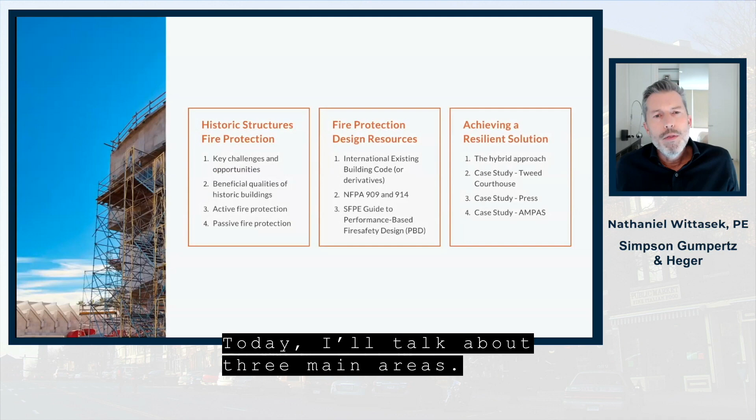Today, I'll talk about three main areas. The first is a general overview of historic structures fire protection. I'll look at the key challenges and opportunities, some of the beneficial qualities of historic buildings, as well as active and passive fire protection and the differences between them. We'll look at fire protection design resources.

If you're trying to achieve something without having to blow the budget or give up on a specific design intent, how can you do that using the codes as your basis, looking at the appropriate standards in the National Fire Protection Association or SFPE, looking at performance-based design? And then looking at resilient solutions - what is the notion of this hybrid approach where you're combining a codified approach with an approach to performance-based design?

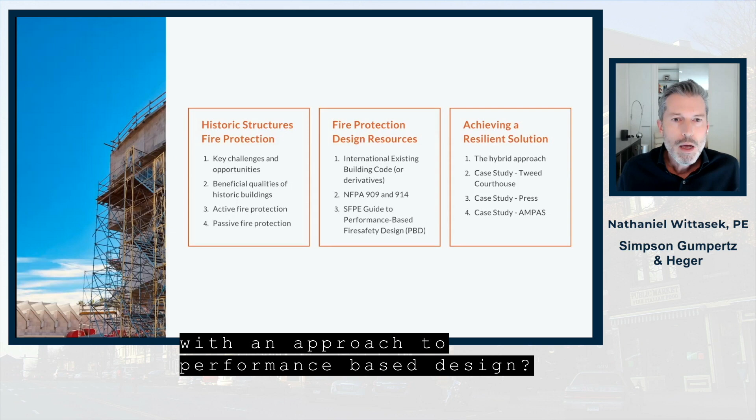I'll look at a few examples that we've dealt with over the years, including the Tweed Courthouse in New York, the Press Building in Los Angeles, and the AMPAS Museum in Los Angeles.

The landscape. Historic structures fire protection is probably one of the more challenging types of fire engineering you can do. For the same reason, it's probably one of the more interesting types of architecture you can find yourself involved with. It's very much about the things that you can't see that define how well or how difficult the process can be. We're looking here at the Mackintosh building, which is part of the Glasgow School of Art.

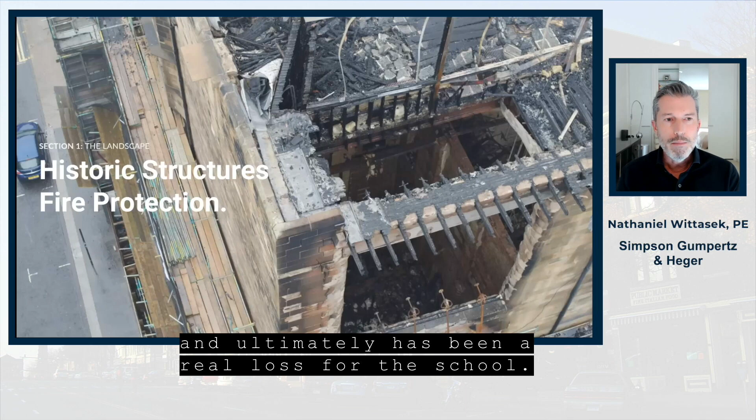It first caught fire in 2014, and while it was being restored, it caught fire again and ultimately has been a real loss for the school. But in part, there were questions and remain questions as to what could have been done differently, how they could have approached the building differently.

This is the question that we ask every single time that we approach a historic building. On the one hand, the building has been there for many, many years. And on the other hand, the building may need some improvements, especially if you're looking at a change of use, a significant alteration, or extensive repairs.

I've heard that fires are rare events, and indeed they are. But if we look at the numbers strictly in the United States, during the time that we will be having this discussion, we'll have approximately one fire in a structure approximately every 64 seconds. And with that, we will have a call for some kind of fire about twice as much as that.

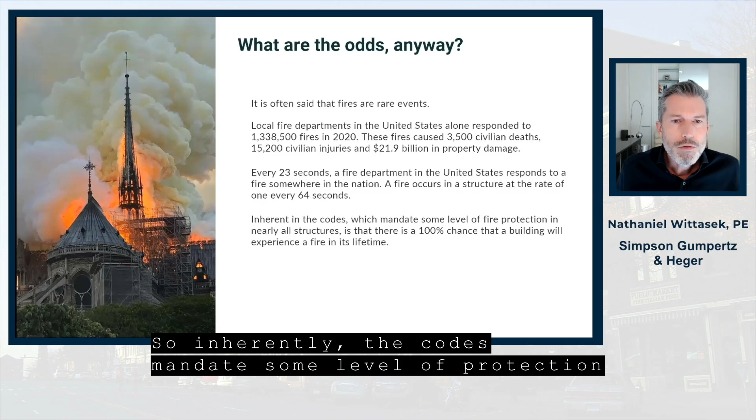So inherently, the codes mandate some level of protection in nearly all structures, with the assumption that the occupants of that structure will at some point face a fire, even though when you look at the larger statistical picture, it's not necessarily something that you would expect to happen at any given moment.

For this first part, I'm going to look at the challenges and opportunities posed by historic buildings. Historic buildings used technologies that were appropriate to the time they were built. Some of the historic buildings may have been constructed using codes, some maybe not. And what we very often find is, irrespective of what kind of code the building was constructed to, many things have often changed over time in those buildings.

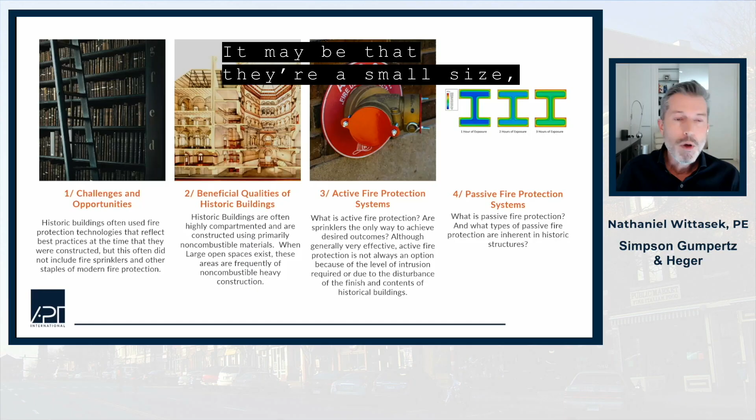What we do find is that the ones we're typically working on very often have some inherent beneficial qualities. It may be that they're a small size, which actually poses less of a threat to life safety. It may be the materials of construction, or maybe they have large volumes capable of absorbing a great deal of heat.

Either way, historic structures were built according to the state of the art at the time and are generally deemed safe and viewed as safe. It's when we start to make alterations to them or a change in occupancy that we really have to think about what we can do differently, and we have to navigate the complex network of codes that guide us.

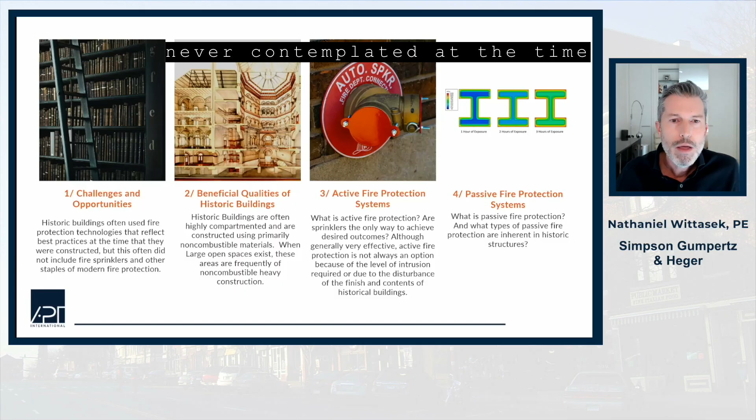As far as active fire protection systems, these pose special challenges for existing and historic structures. One of the main reasons is because these types of systems were often never contemplated at the time the historic structure was built. Because of this, we find ourselves trying to find space or provide an adequate area to actually place the fire protection sprinklers, which becomes a huge challenge for the designers.

Passive fire protection systems, on the other hand, were part and parcel of how many of these structures were constructed and designed in the first place. Whereas we had very few options for active systems, passive systems really took the place of the active systems in many of the historic buildings that we deal with.

I'm going to talk about something that we've all encountered: the notion that structural systems in historic buildings are sometimes vulnerable. On one hand, you may have a structure that's all concrete, blockwork, or stone, which inherently has fire-resistant properties. On the other hand, you may have structural systems that use cast iron, which has inherent challenges, especially when it comes to fire.

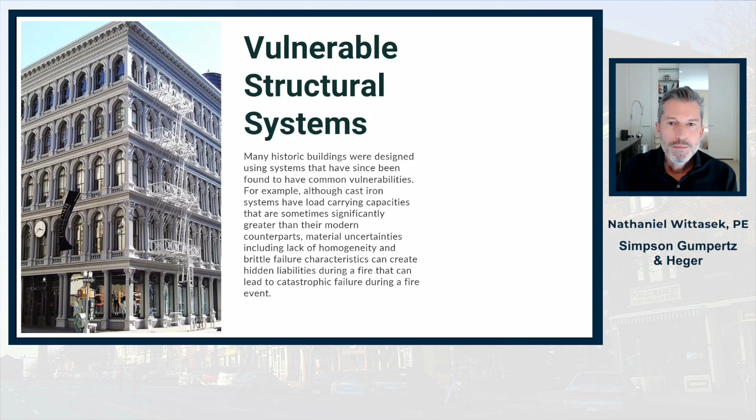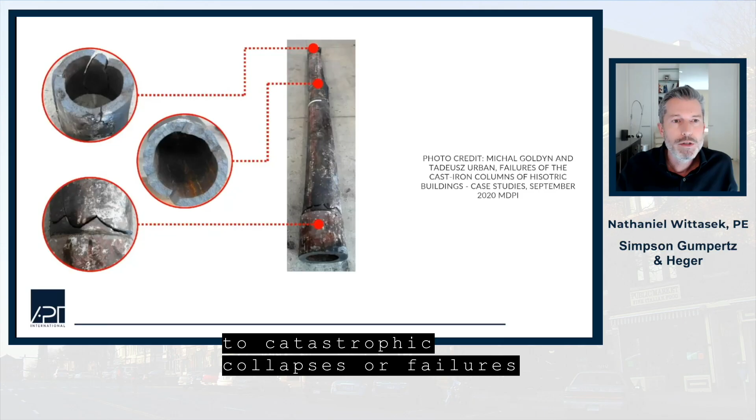In this diagram, you can see an example of some of the challenges we face. While cast iron may be a very strong material, it can sometimes be brittle. That brittle behavior can come about from a number of things, for example when freezing conditions cause water to get inside and expand, cracking the column. Or you could see that brittle behavior expressed through fire—intense heating followed by sudden cooling can cause brittle failure, and those failures can lead to catastrophic collapses of the structural members themselves.

Concealed combustible spaces: by modern standards, we often deal with some level of combustibility in what we'd otherwise think of as non-combustible buildings when dealing with a historic structure. Very often you'll see a building like Notre Dame that is primarily non-combustible but contains, in its hidden spaces, lots of timber. This isn't just Notre Dame—this is true of many older structures throughout our cities. In some cases the structures are entirely made of wood. So what we've learned is that even when there's nothing in the space, these types of combustible construction spaces can become a huge challenge.

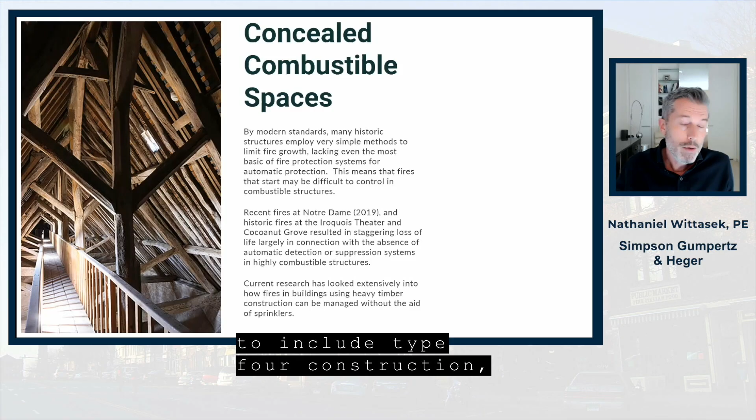One thing we can do is look toward modern research. Modern research shows us that wood, especially if it's dimensionally appropriate, can actually resist the effects of fire. This is why, for example, recent codes have changed to include Type 4 construction, and we're now actually building wood skyscrapers. So if we can build a wood skyscraper, why can't we make the wood in our existing historic structures work well—especially when those structures use members often much larger than what we'd use in conventional heavy timber construction?

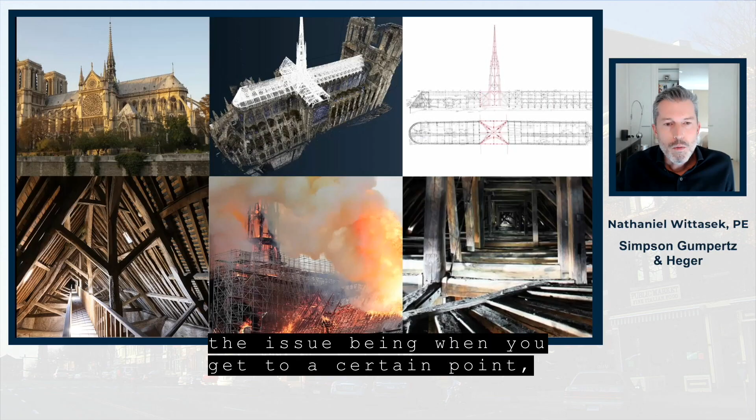Here we're looking at a few pictures of Notre Dame Cathedral. I bring this up because it's timely and relates to topics I'll go through today. We have the cathedral in its original condition, then a model scan showing the roof construction and spire—made of wood—highlighted, next to the actual plans for that. Below, we see what it looked like before the fire, during the fire, and after the fire. The issue is that even heavy timber construction can fail at a certain point. But perhaps we can do things to address that inherently with wood construction.

Let's take a look at a video where we learn about some fire tests recently performed to validate the use of wood in modern construction. This is instructional for how we can address some of the same problems we might deal with in historic building construction. We designed a series of 5 tests to investigate the fire performance of CLT.

To make the test as realistic as possible, we built a 2-story, full-scale structure at the Bureau of Alcohol, Tobacco, and Firearms Fire Research Laboratory. The floor plan was a typical 1-bedroom apartment that we jam-packed with furniture to fuel the fire. Tests 1 through 3 were conducted without a sprinkler system. Test 2 included 30% exposed CLT ceiling in the living room and bedroom, while the other CLT surfaces were covered with gypsum board. To begin the test, the fire was ignited in a lower kitchen cabinet.

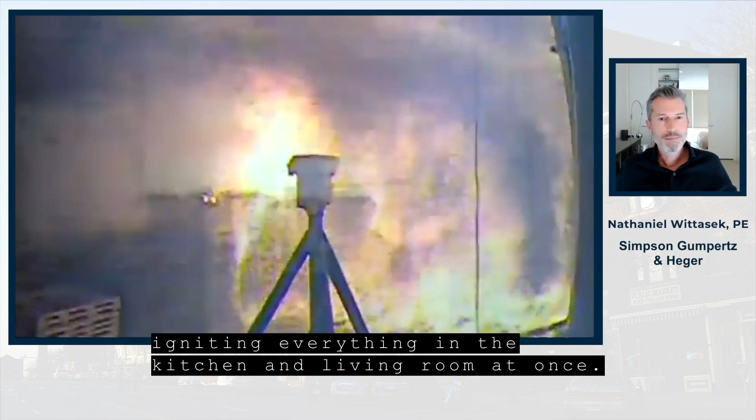As the fire grew, a layer of hot gas began to form on the ceiling, continuing to expand until flashover occurred at about 12 minutes into the test, igniting everything in the kitchen and living room at once. From there, the layer of hot gas spread into the bedroom and the process repeated: the gas layer expanded until flashover was reached and the entire room was engulfed in flames. Flashover in the bedroom occurred roughly 6 minutes after flashover in the kitchen and living room.

Around 25 minutes into the test, the fire began to decay. After the fire started to die down, the apartment door failed at 30 minutes. However, the fire did not spread into the hallway, maintaining a safe environment for firefighters and people leaving the building. As the contents of the apartment burned out, the fire self-extinguished.

For the 4th and 5th tests, we explored the effect of an automatic fire sprinkler system on fire performance. The CLT was left completely exposed for the 5th test, and we delayed the activation of the sprinkler system for 20 minutes. Temperatures soared to around 700 degrees Celsius, but once the sprinklers were activated, they cooled to approximately 50 degrees Celsius in a matter of minutes. The sprinklers effectively suppressed the fully engulfed apartment.

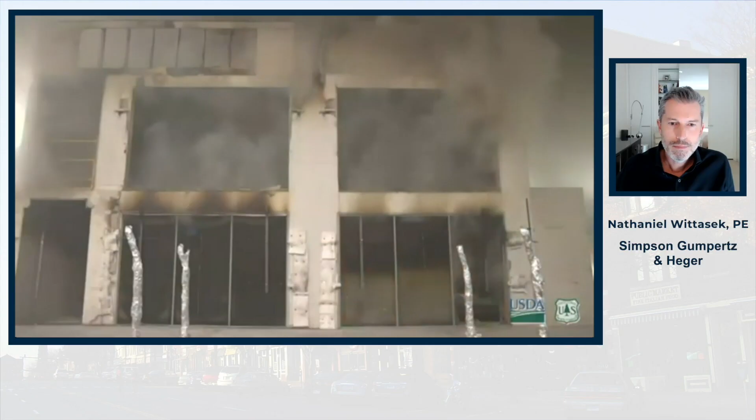These tests demonstrated that it is possible to build a cross-laminated timber building that's fire-resistant, even with exposed CLT. Researchers now have a better understanding of the performance of timber buildings under fire conditions. The data collected will help inform building codes, address the safety of occupants, and lead to safer firefighting in CLT buildings, allowing designers to bring wood buildings to new heights.

While a lot of this is applicable to, for example, CLT, a great part of the research was focused on the inherent fire resistance of heavy timber, and especially the charring characteristics. This is true for both heavy timber structures that are provided with sprinkler protection and heavy timber structures that are not provided with sprinkler protection.

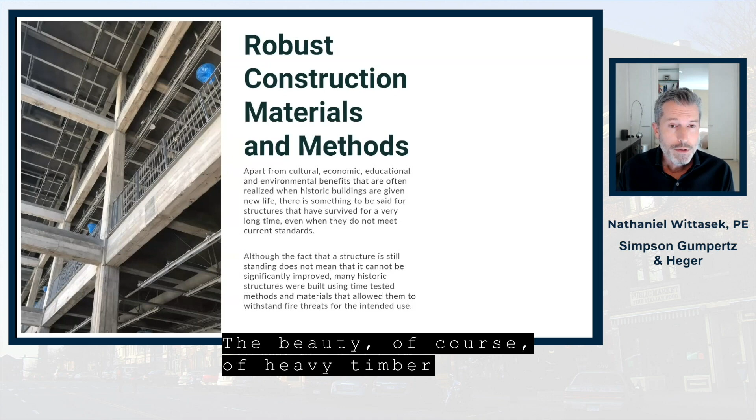The beauty, of course, of heavy timber is that it is a passive fire protection system in of itself. It is when you are trying to achieve specific ratings that you may have to complement existing heavy timber with certain types of non-combustible coverings. In the case of the testing that led to the changes in the International Building Code, for example, the material used to achieve those higher ratings was gypsum.

Now, in these cases, I wanted you to note that part of the test regime that was run included non-sprinklered cases. This is important because many of the historic structures that we deal with are not sprinklered. And as we all know, sometimes this can be a major challenge, to introduce sprinklers.

But perhaps by treating some of the exposed wood in concealed areas, we can actually achieve some of the aims that we're trying to achieve with sprinklers. And I think that's one of the key lessons to take with you: sprinklers are one way to achieve the intended aims of a fire life safety design, but they're certainly not the only way to do it.

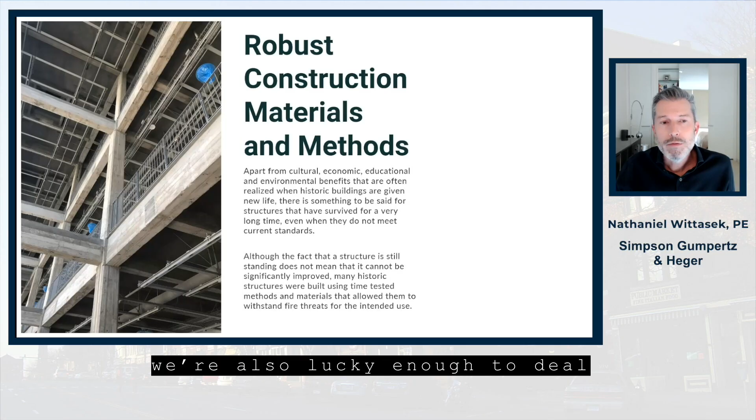In many of the historic buildings that we deal with, we're also lucky enough to deal with very robust materials. Here, for example, you can see board-formed concrete columns and beams. These are part of an existing historic structure that was being renovated.

And while you have to clean up some of the spalling and areas where the structure may have come apart over the years, that is quite doable, and you actually are left with a very robust structure at the end of the day. This is true of many, many historic buildings that we wish to save, and in some cases will result in a life safety system that will exceed what we would even anticipate using the current codes.

When I speak of active fire protection systems, of course, I'm referring primarily to fire sprinkler systems. Active fire protection systems are those systems that involve initiating elements that trigger complex responses by one or more building systems comprised of multiple elements that act together to limit the effect of smoke and fire. This sounds complicated in part because it is a bit more complicated.

Active systems require that we rely on lots of pieces working together. Common examples of these types of systems, of course, are fire sprinklers, smoke control or venting systems, automatic closing fire shutters, which may be part of a passive system, and emergency communications alarms that are typically used in many of our modern buildings.

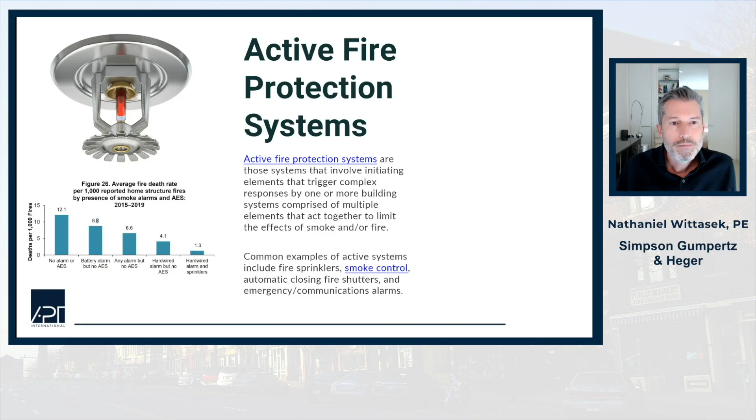Passive systems, on the other hand, are really the oldest form of fire protection. They're systems that do not require a sequenced response to aid in the control of smoke or fire spread. They're always in place and constantly working to reduce fire spread before a fire event starts, and to assist in the safe occupant evacuation during a fire event.

Passive systems are quite interesting because sometimes a passive system will contain an active element. For example, if you have an automatic closing door, you might say that's part of an active system, but this is where the line blurs a little. The point is that it will fail-safe close typically, and then allow the barrier systems in the building to control and contain the effects of fire.

Containing the effects of fire serves a couple of purposes. First, it prevents the fire from spreading to many areas of the building simultaneously. Second, it allows time for occupants to move away from the hazard, out of the building into a point of safety, and time for firefighters to reach the building and control the fire through manual suppression efforts.

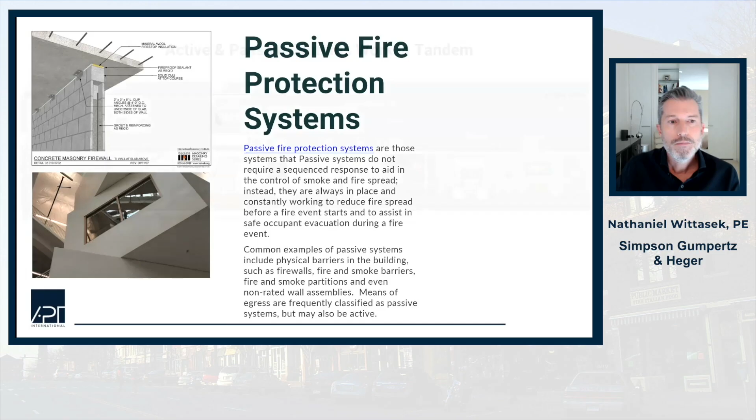Active and passive systems work together, of course. That's the reality. And what we find in historic buildings is that the trade-offs between active and passive systems are essential. You have to have the ability to trade one type of system for another if you're intending to preserve something that was not designed originally according to a specific code.

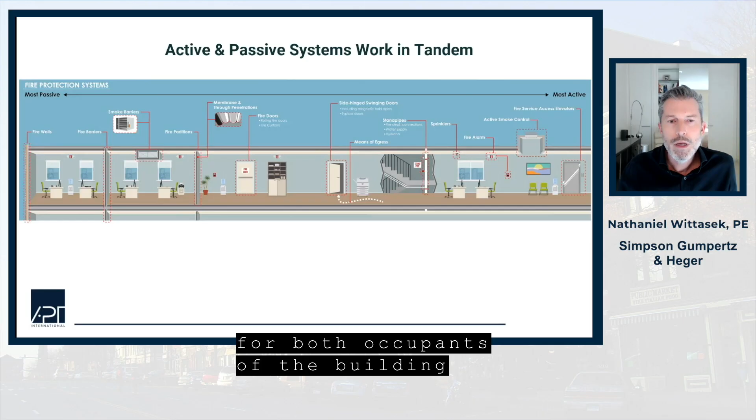You may have sprinklers used to substitute for a lack of passive barriers. Or alternatively, if you can't provide sprinklers, you could use passive barrier systems to achieve a similar level of safety. We are definitely biased towards providing sprinklers in these types of structures, but sprinklers are not the only solution. Again, it's about containing fires and buying time for both occupants of the building and the firefighters there to respond to building fires.

Part 2, let's look at the rules of the road: historic buildings, fire protection, design resources.

Now, how can you use design tools to come up with smart solutions? Well, in the United States, we follow prescriptive codes largely. But even in our prescriptive codes, there are performance-based aspects of those codes. These prescriptive codes have served us well, for well over 100 years, for more than 99% of the buildings out there.

There are, however, some projects for which the sole use of prescriptive approaches may not yield a result that is either cost-effective, sensitive to your particular aesthetic or the historic features of a building, or responsive to other unique characteristics of the structure. So it is when we use the codes and standards together with performance-based design that we can achieve better results for the remaining 1% of those buildings.

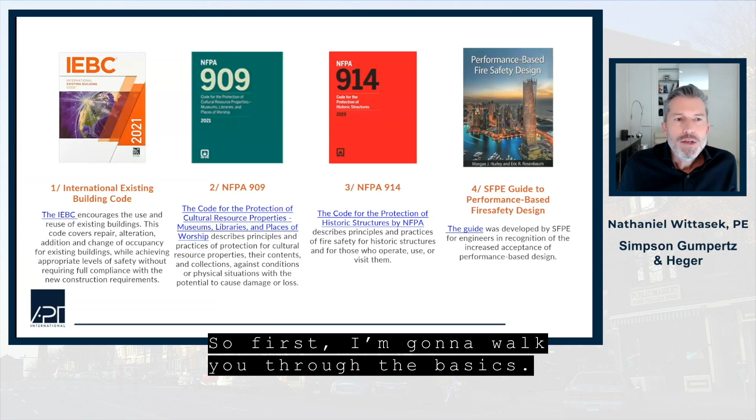So first, I'm going to walk you through the basics. The International Existing Building Code is one of the codes that many jurisdictions across the country adopt. It's designed to encourage the use and reuse of existing buildings. The whole purpose is to allow us to make effective and safe restorations to allow for the continued use of buildings. Within this subset is a subset of historic buildings.

Some states, like California, have their own state historical building code, and it works in concert with the existing building code.

Second, standards such as NFPA 909 or 914, the Code for Protection of Cultural Resource Properties, museums, libraries, and places of worship, or the Code for the Protection of Historic Structures, are both examples of standards that are sometimes applied very much like a code, or applied in the context of the code process.

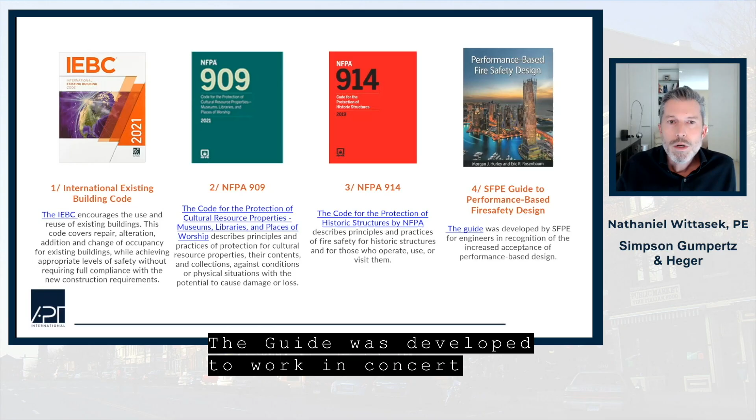Finally, we have the guide. The guide is produced by the Society of Fire Protection Engineers. It was developed to work in concert with the standards and the codes to allow for performance-based design. I'll touch on this in just a moment.

In the International Existing Building Code, there are key areas of concern, which is to establish what the minimum requirements for safety are. One of the principles in fire and life safety is that if you're going to touch a building, if you're going to work on it, you should at least meet basic standards for fire protection and life safety. And so this code has been set up to address those.

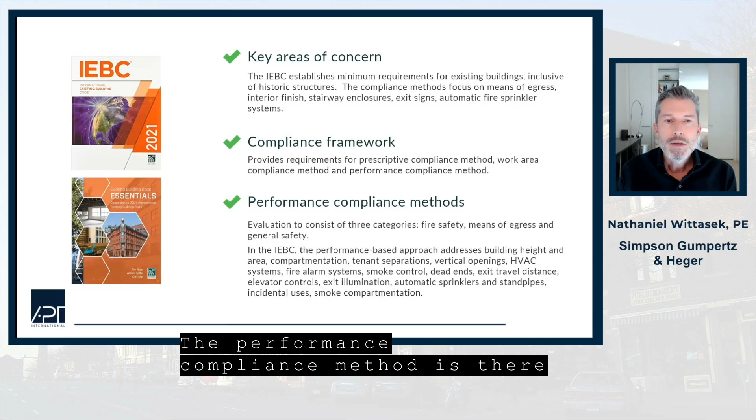It provides these through a compliance framework, which lays out prescriptive compliance methods, what's called the work area compliance method, and the performance compliance method. The performance compliance method is there to help us address 3 main categories: fire safety, means of egress, and general safety.

It's here that we're able to look at the specifics of a historic structure and evaluate them on a comparative or relative basis. This helps us understand if what we're doing is making the structure safer, ultimately, or potentially less safe through unintentional modifications.

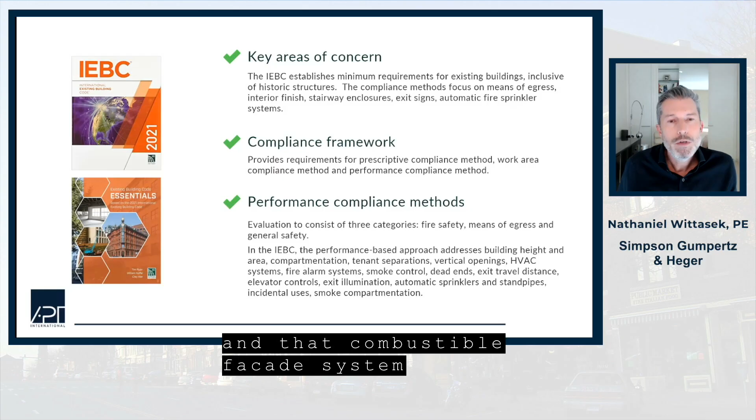We've all heard of cases where structures have been unintentionally made less safe. One that immediately comes to mind is the Grenfell fire. They added a combustible facade system, and that ultimately made the building less safe, even though it was designed and intended to improve the quality of life for the people in the building.

NFPA 909 contains many resources. These two, 909 and 914, are probably the most referenced when it comes to historic buildings. Even though 909 is addressed to the protection of cultural resource properties, museums, libraries, and places of worship, many of its principles are often applied to other historic buildings.

The idea is to be able to understand what the improvements are or are not doing, whether they are affecting the life safety in the building, and how you can quantify that in a way that everyone can understand what's happening and if they're comfortable with that.

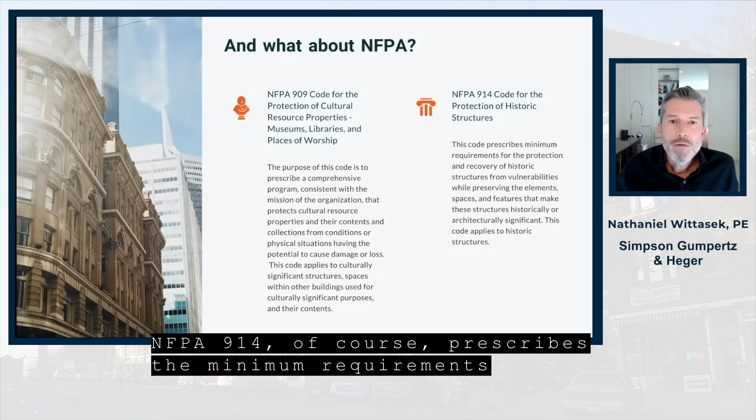NFPA 914 prescribes the minimum requirements for the protection and recovery of historic structures from vulnerabilities while preserving the elements, spaces, and features that make them historically or architecturally significant. This is a recognition that there are features in these buildings that may not comply with current codes, but which are extremely important in terms of the overall purpose and history of the building and its continued use.

The SFPE performance-based process is used in conjunction with both of these standards and with the International Existing Building Code. This process was developed by the Society of Fire Protection Engineers specifically to address complex challenges for fire protection. And these challenges don't always have the same solution.

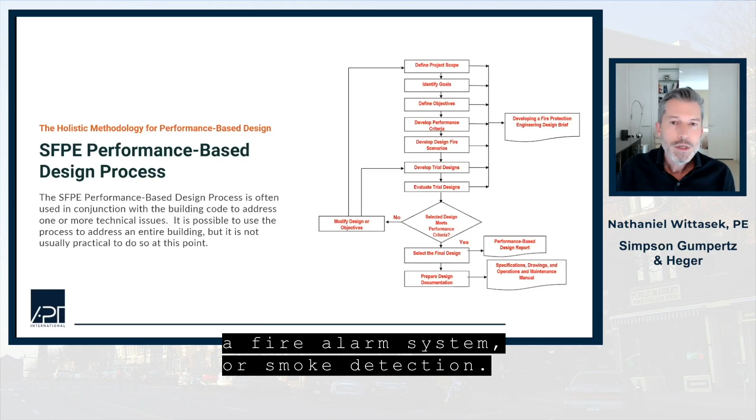The codes tell you to provide sprinklers, or they tell you to provide a fire alarm system or smoke detection. This approach only asks you: what are your goals? What are your objectives? And what are the criteria that we must meet to be considered successful?

By establishing those for any given problem, it doesn't have to be for an entire building, but could be for a specific problem you're trying to address in an existing historic structure, you can solve that problem. So this is effectively a communications tool and a methodology for analyzing hazards.

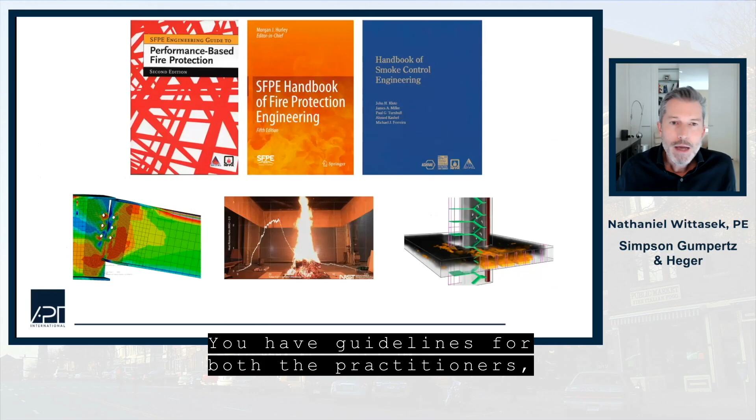The method comes with more than the flowchart, of course. You have guidelines for both the practitioners and for the authorities having jurisdiction. You have compendiums of resources for fire protection calculations, smoke control, and numerous other tools.

In performance-based design for historic structures, we start with the design fire, which is what we see here in the middle at the bottom. That design fire is what we use to evaluate safety for different scenarios in the building. In any given building, you may have multiple scenarios and multiple design fires.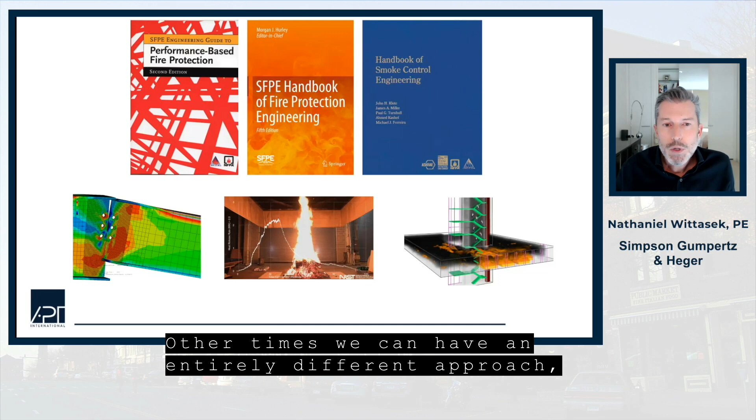Once we know what we're facing, we can address that through thoughtful analysis with thoughtful solutions that fit with either what's there with minor modifications, and sometimes with substantial modifications. Other times we can have an entirely different approach, or multiple approaches, that yield the same result. This is the beauty of the performance-based method, and why, in part, it works so well with historic structures.

In this last part, I'll walk you through achieving resilient solutions. I'll walk you through some examples of projects with which I have personally participated, or my colleagues have participated, over the years.

Buildings, when they're maintained as they were intended to be, with minimal disruptions, absolutely serve our society. They do hold a special place for all of us in preserving tradition, and it's one of the reasons why we have to take special care to actually preserve these buildings.

Resiliency is a term that's often used to describe how a building responds to threats of any kind. For example, the USGBC defines resilience as the ability to prepare and plan for, absorb, recover from, and more successfully adapt to adverse events.

Sometimes resilience is just about outlasting the other guy. In the case of a historic building, these buildings have shown us remarkable resilience over time. Sometimes they fall out of use, and the very interventions that architects and engineers perform can make a huge difference, allowing these buildings to continue showing their resilience. What we have to watch out for is when we perform specific alterations or changes to these structures—that's when we may get into trouble. But it's also an opportunity to truly preserve for a much longer time, and for more people, what was there, allowing continued use of these beautiful structures.

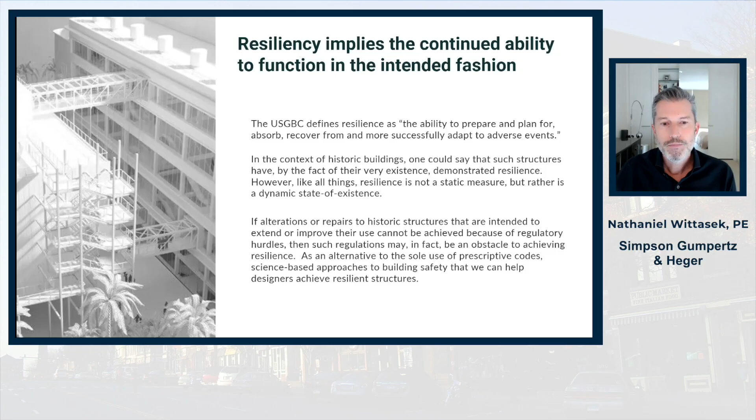I'm going to touch upon the notion of the hybrid approach, which I referenced at the beginning of this presentation. The real world is not purely code, and it's not purely performance-based, at least not in most buildings we work on in the United States. Many of our projects involve elements of both performance and prescriptive design. It's not practical to look at the entire building using performance-based design at this time, but it's also not practical to rely solely upon prescriptive requirements. Prescriptive requirements were developed with the notion that they would work for most buildings most of the time, and they've done remarkably well at that.

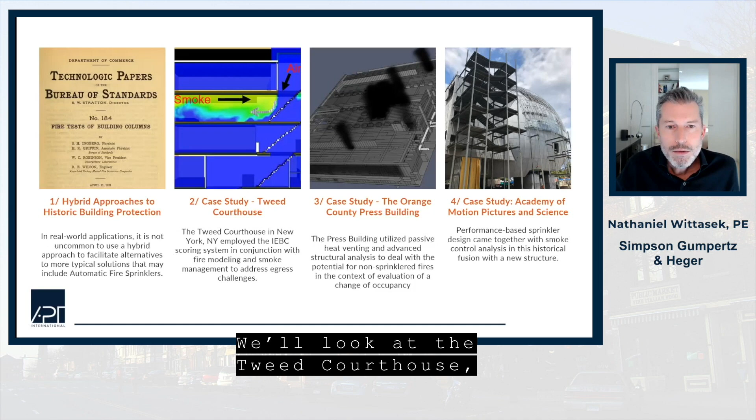I'll briefly walk you through some examples of how our approaches have helped us address complex challenges, sometimes with and sometimes without fire protection sprinkler systems. We'll look at the Tweed Courthouse, the Orange County Press Building which served the Los Angeles Times, and the Academy of Motion Pictures and Science. This structure is a fusion of new and old.

Before I go there, I'll talk about what's on everyone's mind: how do we deal with the constant challenge of being asked to provide fire protection or sprinkler systems in these beautiful old structures? Very often, you'd be surprised, but it can be done in many cases, and there are reasons why it has become much more the norm over the past few years. For example, in the structure you're seeing right now, which I worked on for several years, there are sprinklers in some areas, but in other areas that were sensitive because of aesthetic or other reasons, we did not have sprinklers, or we had modifications to what would have otherwise been required by NFPA 13, the standard for installation of sprinkler systems.

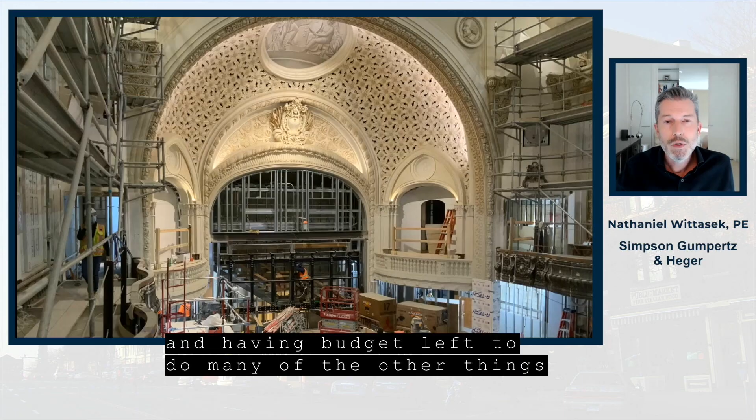The bigger issue, of course, for many owners is cost. You have to sometimes look to more creative approaches to understand how we can achieve the level of protection we desire without destroying the budget, leaving budget left to do many of the other things we wish to achieve in these historic structures.

The general approach is that we first start by identifying the historic building code requirements, using the codes I described earlier. Then we focus on the most important challenges—what are the issues that we know are of the greatest concern to the authorities having jurisdiction, i.e. the fire marshal or the building official?

Next, we set up a way to work together—not just as the design team, but as the design team with the authorities having jurisdiction. In my experience, the AHJ is one of the most critical members of this team, because the AHJ lives with this building in terms of their response to it and their responsibility for protecting it down the road.

Once we understand what the stakeholders want, what the building needs, and what the baseline requirements are, that's when we can start to consider the holistic approach. This is an approach that may start with a prescriptive basis but identify a key challenge—some may call it a deficiency, others may call it an alternate means and methods. But it is this approach that lets us often arrive at solutions that can meet our needs, whatever those needs may be.

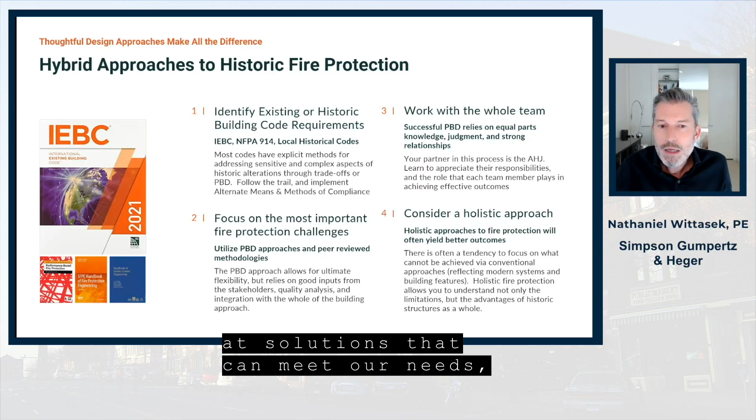As I alluded to, engagement is the key. The way that we tackle performance-based design with prescriptive design makes all the difference. The approach should adhere to our basic codes, the standards, the SFPE guidelines when we're dealing with performance-based design. We should look at our analysis methods and tie them together with peer reviewed references. The key is you can't go out there and make up your own methodology and expect it to be received well—you should be using methodologies that have been peer reviewed or that at least have a basis in literature.

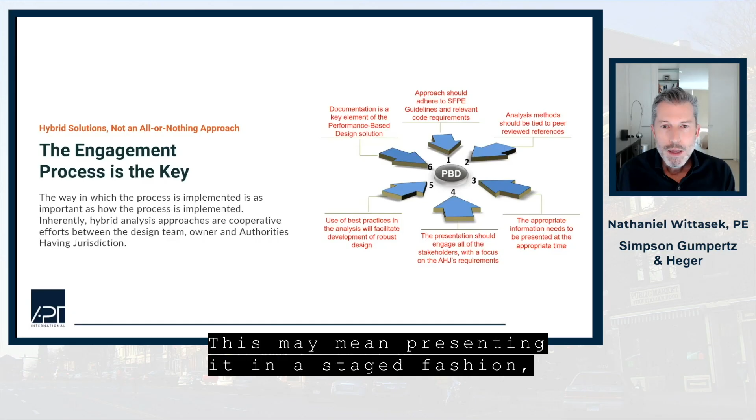Next, we look at what information needs to be presented at the right time. Many of these projects can seem overwhelming to an authority having jurisdiction who's responsible for reviewing them. A key is that you present the right information at the right time. This may mean presenting it in a staged fashion, and it may mean presenting concepts before you present solutions.

You need to make sure that all of the stakeholders are engaged. The authority having jurisdiction will be a focal point of making this process happen. We have the technical means to make this happen. The issue is whether we have the capabilities in terms of communications to make these types of solutions happen.

And then we set about our analysis. We use our best practices in the analysis. We pull together the right documentation, and we can demonstrate both quantitatively and through experience as a team that the solutions are robust. And very often they tie back to code solutions.

The final part is preparing the final documentation. This documentation lives with the buildings.

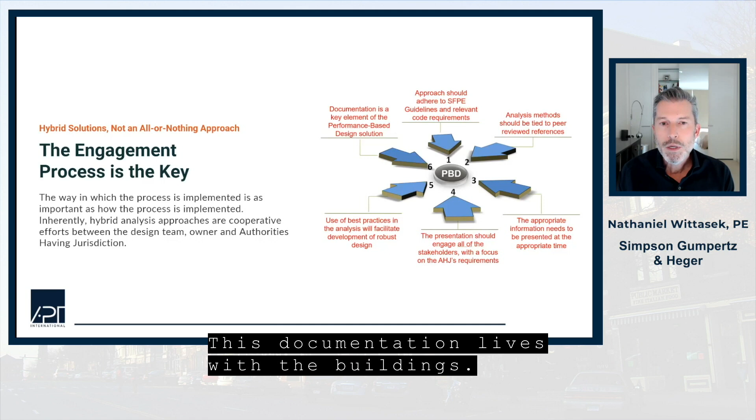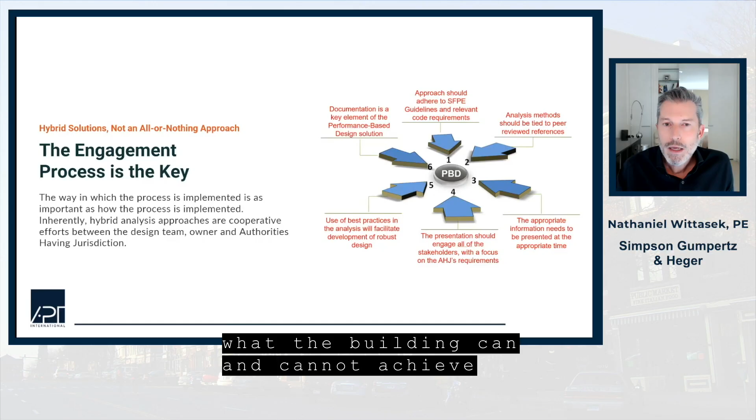One thing it's important to mention is that in historic buildings, and when you're doing a hybrid approach, where say you're removing sprinklers in lieu of some other type of feature, it's extremely important to list out what those limitations of the structure are. For example, in some structures, we may have a case where we have a fuel-controlled condition. In other words, we don't have sprinklers, but we also know that a particular space is not designed nor has historically ever contained very much in the way of fuel load. These are the types of assumptions that have to be documented, and the limitations have to be explicitly documented so that everyone knows, from the user to the authority having jurisdiction, what the building can and cannot achieve with the proposed design.

Creative approaches also includes specialized tools or technologies. One example is aspirating smoke detection. In aspirating smoke detection, we very often have a tool that allows us to know about a fire long before we would otherwise know about it. Aspirating smoke detectors are much more sensitive, or can be the same sensitivity as a standard detector. But what's really interesting about an aspirating smoke detector is that it is often invisible.

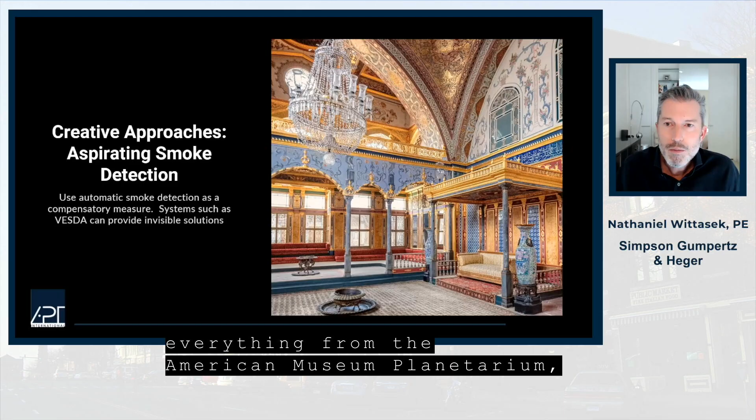You might not realize that there are numerous aspirating smoke detectors in this very image. It is because they're hidden. When you go in theme park rides, you don't want to see smoke detectors, so you use an aspirating technology. The beauty of that technology is not only is it efficient, but it's something that is less obtrusive to many historic structures. And it's for this reason that many heritage sites rely on these types of systems. Everything from the American Museum Planetarium to Hearst Castle to the King's College to the National Gallery, St. Paul's Cathedral. All of these structures rely to some extent on very early smoke detection systems.

You may not want water because you have very sensitive contents. One of the early projects I worked on was the Griffith Observatory. The observatory had extremely expensive equipment inside of a historic structure. So we had, on the one hand, equipment that was sensitive to water damage. On the other hand, a historic structure with a planetarium that was difficult to modify.

And also just the concern that we need to actually maintain a public facility operational. It was in effect a public place. And so we have an obligation to make sure we provide the best forms of protection. St. Patrick's Cathedral, shown on the screen, is the largest neo-Gothic style Roman Catholic cathedral in the United States. It's, you could say, New York City's Notre Dame.

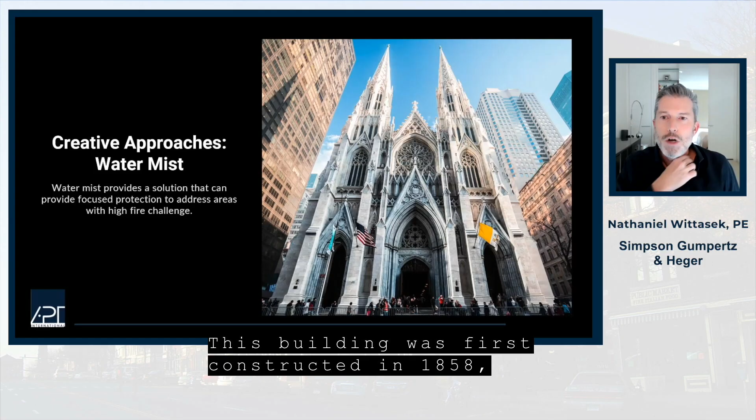This building was first constructed in 1858, and it was renovated recently. One of the systems that was added in the upper roof area was a high fog system. This high fog system used approximately 1/10 of the amount of water of a standard sprinkler system. It was effectively able to control the fires that might happen in the concealed combustible spaces, much like what we saw in Notre Dame.

Fortunately, they did install the system. There were a few, like any project, there were a few issues getting it up and running. But once it was up and running, they had a level of protection that would ultimately prevent and should ultimately prevent the same kind of outcome as what we saw in 2019 at Notre Dame.

So little technologies can make a huge difference when you think about the destruction that a typical fire causes. Many times we worry about water damage, but what we have to be thinking about more so in many cases is the fire damage. While it's true that you're more likely to potentially have an inadvertent activation, it's also true that the outcome of an inadvertent fire can be much more severe without it. And the beauty of the water mist is that it uses a fraction, literally a fraction of the water as a standard sprinkler system. The heads are discreet, and it's far more effective at controlling heat in spaces.

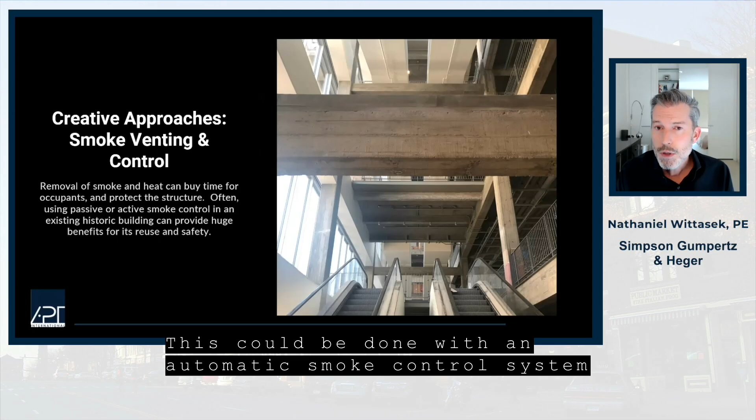Smoke venting and control. Sometimes we'll take an existing historic building and open it up, providing operable windows or a vent at the top. This allows for the continued or modified use of that building by allowing smoke and heat to vent during a fire. This could be done with an automatic smoke control system or through natural venting, as was the case at the Academy Awards Museum, which used a combination of mechanical smoke control and natural ventilation to achieve enhanced life safety—not just for building occupants, but for the safety of the structure itself, because when you remove heat, you inherently remove threats to the structure.

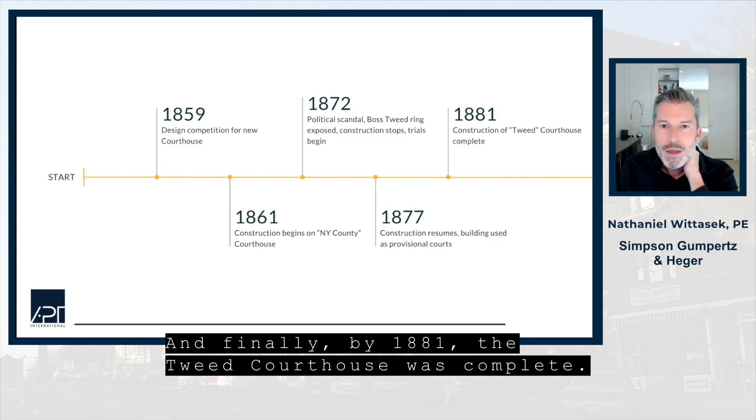The Tweed Courthouse is my first case study. This is in New York, New York—a beautiful example of a restoration to allow it to have a versatile use moving forward. In 1859, the design competition started for the new courthouse. In 1861, construction began for what was then a county courthouse. There was a scandal shortly thereafter, construction stopped, and the trial began. It resumed in 1877, five years later, and finally by 1881 the Tweed Courthouse was complete.

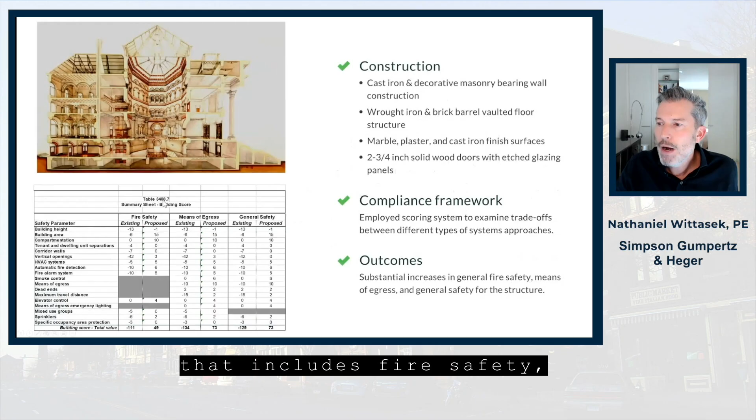So what was done here is an example of a points-based system, where you start out with three general categories: fire safety, means of egress, and general safety. You look at the existing conditions and the proposed conditions, and utilize the scoring system to assess what your proposed changes are doing versus the existing building condition. At the end of the day, you can quantify, on a relative basis, the actual improvements to fire safety, means of egress, and general safety for the building as a whole.

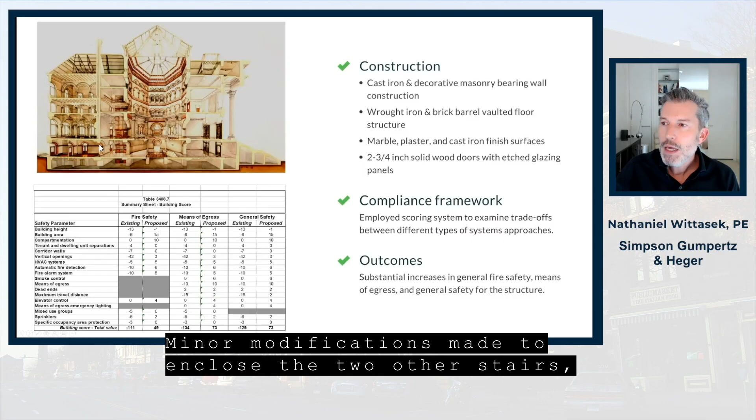This was based on assumptions and performance-based design, as well as some prescriptive options. At the end of the day, the building was allowed to remain with its central grand stairs serving the rotunda open on all levels. Minor modifications were made to enclose the two other stairs, but overall this was a success in terms of allowing for the continued use of the structure.

In this second case study, we were dealing with a historic printing press building in Costa Mesa, California, which was ultimately used by the Los Angeles Times. This entailed the thoughtful adaptation of an existing industrial building into creative space and a food hall. There was a desire to preserve, not because of a mandate from a historical building code, but primarily because they needed to adapt it for the kind of use for which it would be best suited in the future—the existing structure was beautiful enough that the architects and owners sought to maintain it as a central feature of the new design.

And this is like any good building—we see it has nine lives, but you have to look at what are some of the things you need to do along the way to ensure that next life will actually come to fruition.

The design drivers in this case were functional retail needs, so they needed multiple levels open within the space. Because this is in Southern California, indoor-outdoor experiences were integral to the success. There was a large assembly use planned for the space that was obviously not part of a press building—normally this is the place where you get the book thrown at you. And pre-existing structural and other construction conditions did not always make it possible to easily adapt the existing building for those uses.

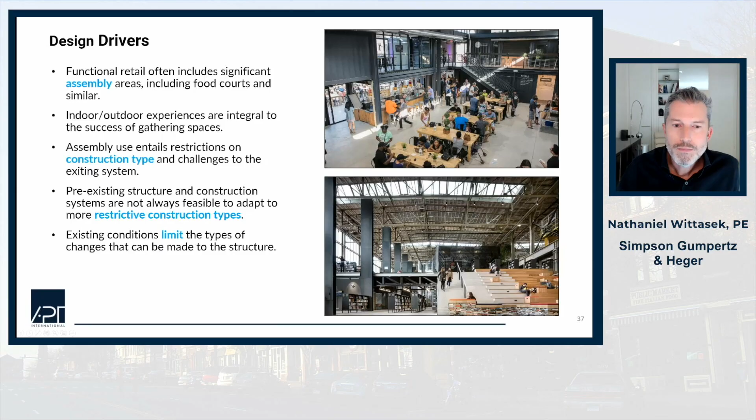So what the team did together is they used the California existing building code as a starting point. They applied the best practices for new elements using the standard building code based on the International Building Code, and then mixed in performance-based design. Instead of looking at the building as a series of pieces, the building was looked at as a whole. And this is when we were able to take advantage of many of the beneficial features of the existing construction relative to the safety of the new building.

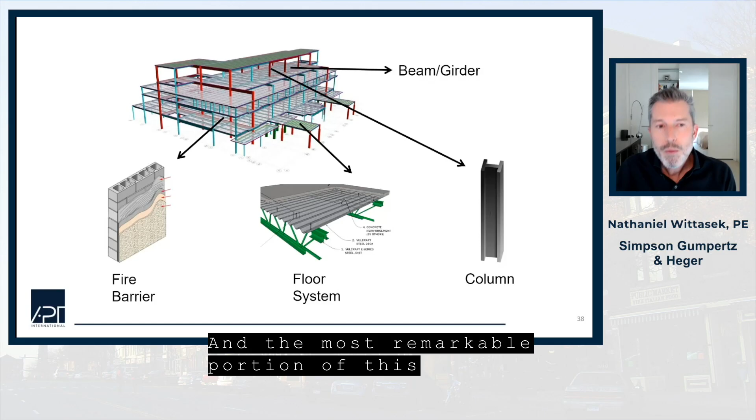Now, in new construction, you would typically be required to have fire-resistant construction throughout. But with this type of approach, it was able to be demonstrated that a level of safety could be provided for the structure, for the occupants, and for firefighters that would allow you to remove some of that fireproofing down the road that would have otherwise been kicked in because of the change of use. And the most remarkable portion of this is that the analysis had to be done assuming that sprinklers did not activate. In opening up the space, none of the sprinklers were actually brought into any portion of the analysis for the structure.

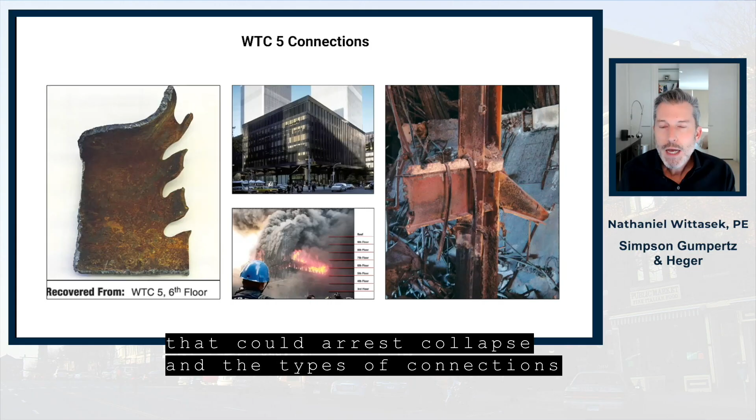This was a lesson that had been learned from World Trade Center. We always think of World Trade Center 1 and 2, but World Trade Center 5 was a moment of inspiration for many engineers. What we learned from the failure of World Trade Center 5 was that the types of connections you have make all the difference in terms of a building's performance in a fire. If you apply fireproofing, it doesn't mean that the structure will necessarily perform the way you think it does using what's called indexed fire protection. That's simply when you have a structure where you say, I want 1 hour of fire resistance. Does this mean the building will absolutely stand up for 1 hour in a fire? It may not. What they realized in the collapse of World Trade Center 5 was that the types of connections that could arrest collapse, and keep the building and its occupants safer even without fireproofing on all of the structural members, was one of the things that really mattered.

So the analysis that was undertaken used the approaches from ASCE 7, Appendix E, in conjunction with design fires established by the Society of Fire Protection Engineers and other methodologies for scenarios established by NFPA. This analysis was implemented across the actual structure for the press. Here you can see the type of column tree connections that failed in World Trade Center. It was exactly these types of connections that could be upgraded to yield a significantly and quantitatively better result for an existing structure.

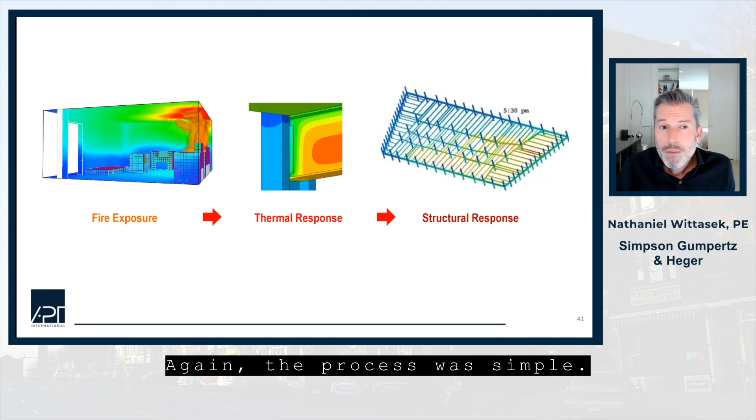Again, the process was simple. You looked at the fire exposure in the building, the thermal response, and then what's the structural response to that fire.

We set up briefs and had discussions with the authorities, and ultimately were able to use and include new natural ventilation openings in this old historic structure without compromising the integrity of the historic fabric, and get a new continued use out of this structure that also met the aesthetic concerns of the design team. There were areas where structure was removed, and we were able to demonstrate through analysis, using CFD analysis in this case, that we could maintain a safe condition and maintain tenability for occupants for the proposed new conditions better than even the historic condition.

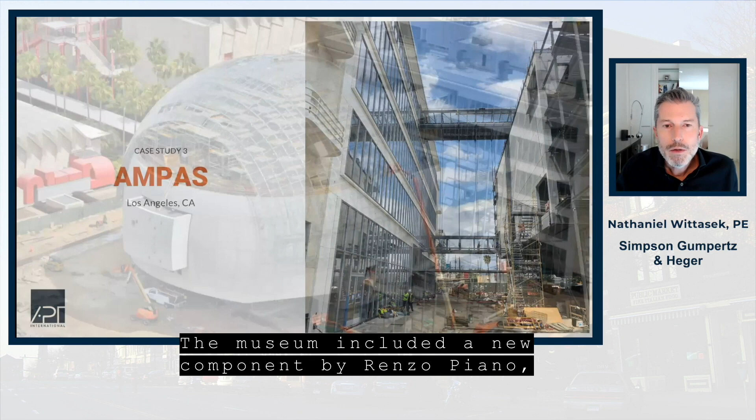Finally, the fusion of old and new. The Academy Awards Museum, the Academy of Motion Pictures and Science, created a museum in Los Angeles that was recently opened. The museum included a new component by Renzo Piano, mated with the existing May Company building, which was a historic structure. Together, these two elements operate seamlessly and are interconnected on a normal day-to-day basis. So mating a historic structure that has registered features with a new structure is certainly a challenge, but it's another example of where the hybrid approach works very well.

Museum design is driven by the need to maintain that balance: controlled exhibit space and inviting, navigable spaces with actual safety. There's an aesthetic mandate which drives this, so this was taken to heart. Again, natural ventilation was looked at in the new portion, and mechanical ventilation was used to exhaust the existing portion of the museum that's historic. Together they worked to create a safer overall concept for the building.

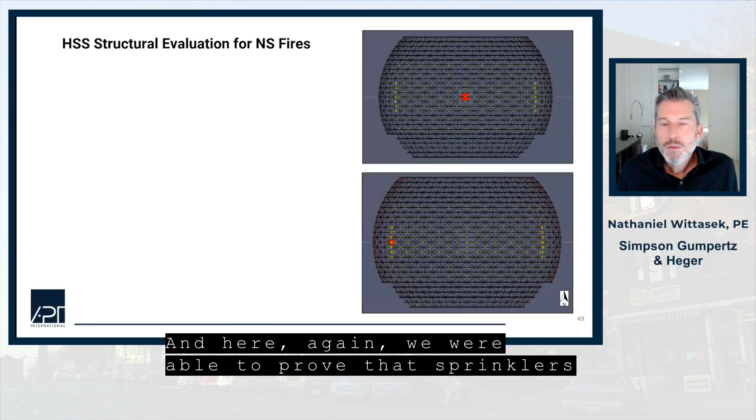And here again, we were able to prove that sprinklers were not even necessary to allow for the control of certain types of fires, and that the structure would ultimately not be damaged in those types of scenarios. So again, it's about combining solid code basis with performance-based design aspects that allow you to look at things a little bit differently and meet your objectives, whatever they may be.

So in conclusion, historic buildings are frequently characterized by inherently fire-resistant features. They do not necessarily employ technologies or methods that we use today, but certainly they employ the technologies and methods that were appropriate to the design at the time and that were commonly in use and that allowed them to make it to current day.

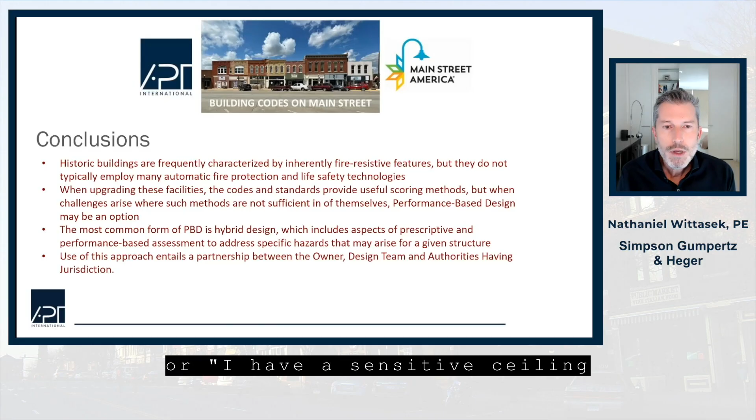When we upgrade these facilities, we have to remember the codes and standards provide incredibly useful methods for evaluating the safety. But when you come up against a specific challenge, such as I can't provide sprinklers up in this bay, or I have a sensitive ceiling because of the artwork painted on the ceiling, that's when we introduce performance-based approaches, either as a part or a whole, to analyze those conditions.

Ultimately, we usually arrive with a hybrid design, which includes the aspects of prescriptive and performance-based assessments that allow us to assess specific hazards that may arise for a given structure. This approach requires that we first know about it, but then that we establish a partnership with the authorities having jurisdiction and the design team and owner. By working together using these methodologies, more and more of these types of historic buildings can be preserved in a way that's true to their origins or true to the intended use that they are being designed for. And that may be a new use for some of these older buildings. Thank you very much for your time, and I hope you enjoy the rest of the presentations.

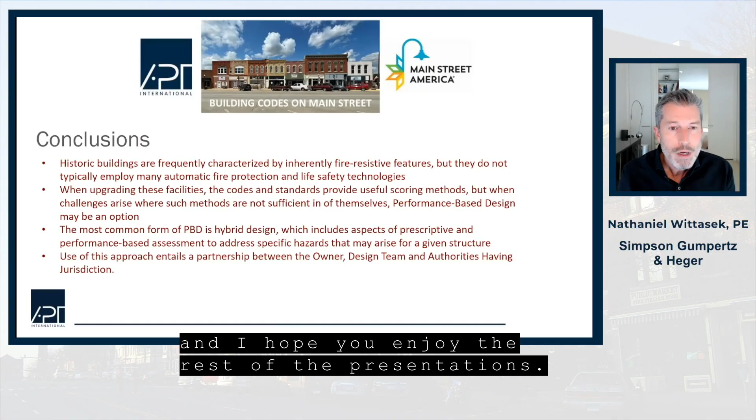I have some questions and some other questions that have arisen on smaller Main Street buildings. Again, we've got a lot of mixed use structures, 2, 3, 4 story, 3,000 square foot per floor. We've got issues, of course, of cost and of the availability of water. And so when sprinkler systems go into these buildings, when they do, can you describe the most common system that folks are going to get? Many also are in smaller communities where there's not access to fire protection engineers designing the system or really sophisticated installers.

That's a great question. We have a few choices. The first, of course, most commonly for commercial would be NFPA 13. But I think a lot of people understand that when you have a limited water supply, NFPA 13 may not offer the best solution, because as soon as you start to implement the 13 system, you're really looking at substantial work potentially underground, and that can be one of the triggers for significant costs for a project.

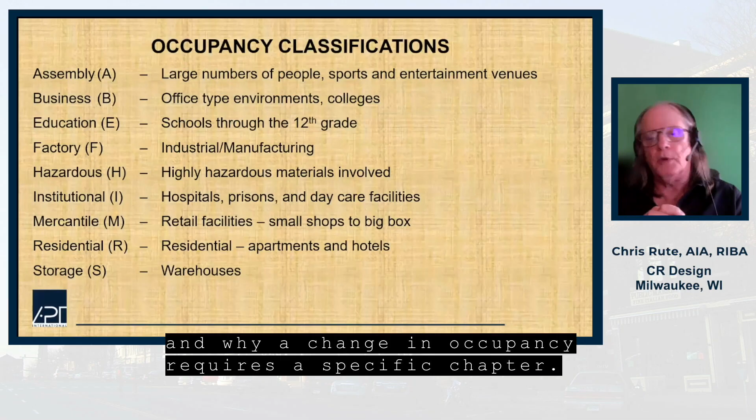The IBC is an occupancy-driven code. Of those occupancies, we deal with assemblies where large numbers of people gather for sports and entertainment venues, for instance, churches or libraries. B occupancies are business, office-type environments and colleges.

Institutional are the hospitals, our prisons, and our daycare facilities. M occupancies or mercantile are retail facilities from small shops to the big box. R is residential, they're apartments or hotels.

S is storage, like warehouses. And U, not shown on the slide, are small sheds and garages and the like.

Because the varied uses have different requirements for each occupancy and are based on the potential hazards that will be of concern. This is easily understood when the limits on building heights and areas, exiting requirements, the active and passive fire and smoke protection control feature thresholds...

...the required fire resistive ratings, and interior finish attributes are different based on the occupancy of a building.

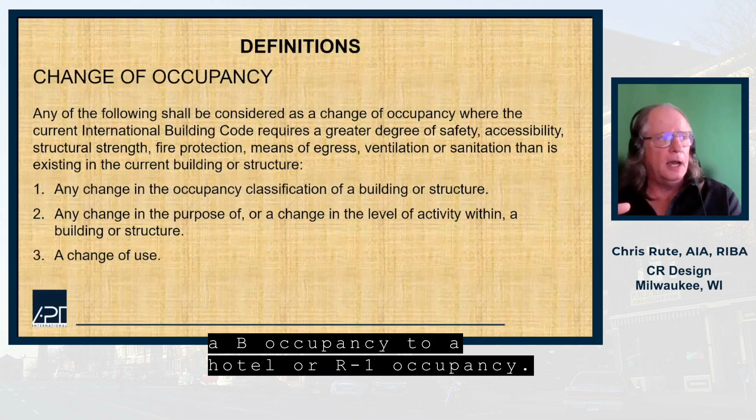A change in occupancy classification of a building or structure. This is the easiest to understand and identify. It involves a change from an office building, a B occupancy, to a hotel R1 occupancy.

Another example would be a big box retail M occupancy being converted to a church, an A3 occupancy. And one more example would involve a warehouse S1 occupancy to an apartment R2 occupancy.

The second, any change in the purpose of or change in the level of activity within a building or structure is also considered a change in occupancy. This one's a bit more nuanced.

For instance, a change from a family restaurant to a nightclub would offer very different concerns, yet both are considered A2 occupancies. No change in the occupancy classification.

Or for instance, increasing the number of living units in an apartment building by subdividing a couple of apartments would be another example where this would be a change of occupancy.

And then we have change of use. Change of use is now defined in the IEBC 2021 version. One example of this is a retail store, an M occupancy, that begins to sell upholstered furniture. Now, it's still a retail store, but it's starting to sell some additional types of materials that burn a little bit more readily. Therefore, now a sprinkler system would be required.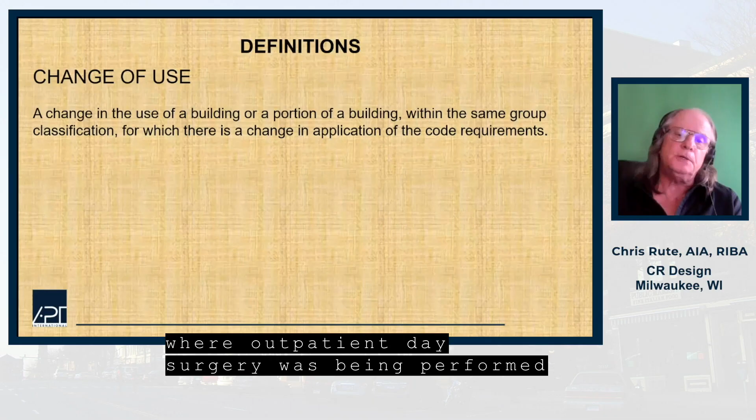Another example would be converting a doctor's office into an ambulatory care facility where outpatient day surgery was being performed, and where patients might be limited in their self-preservation capability. So a distinction must be understood between change of use and change of occupancy classification because they both trigger very different code requirements.

Hopefully, we have an understanding of the concept of different code requirements based on the use and the occupancy type, and of the distinction between the change of occupancy versus the change of occupancy classification. With that understanding, we can now look at some of the specific requirements of IEBC Chapter 10.

IEBC Chapter 10 sections 1001 through 1010 will apply for all three occupancy scenarios we discussed previously. This first section here is the general scoping section and provides a distinction between the requirements for a change of occupancy, in which sections 1002 through 1010 will apply, and the added requirements when a change of occupancy classification is proposed. So sections 1002 through 1011 will apply in these situations.

Section 1002 is critical because it stipulates that if a building undergoes a change of use to one of the special occupancies of Chapter 4 of the IBC, such as covered malls, atriums, underground buildings and such, the IEBC is not applicable to that portion of the building where those special occupancies are proposed or exist. The provisions of the IEBC are not adequate to address the hazards that the special occupancies offer, and as such, those occupancy types must meet the requirements for new construction as found in the IBC.

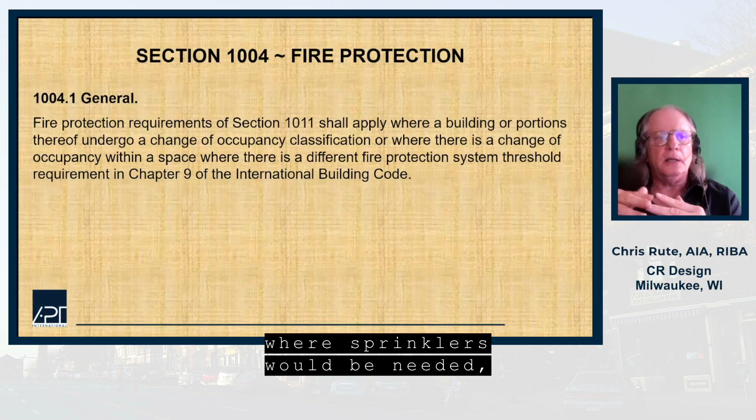Section 1004 deals with fire protection requirements, which will be brought to bear for changes of occupancy classification, as well as when the change of occupancy moves to a use with a different fire protection threshold. The two examples mentioned earlier where sprinklers would be needed was a retail facility adding upholstered furniture to their offerings, or when the doctor's office begins to perform day surgery.

In section 1005, unless a change of occupancy classification occurs, egress will also be addressed by the preceding alterations chapters.

Section 1006 deals with the structural issues. This section speaks to the structure of the existing building. Even if there's no change of occupancy classification, the potential for higher structural live, snow, and wind load requirements does exist. Corridors in an office building have a higher load requirement than does the office space itself. So reconfiguration of a floor plan might result in newly formed corridors, and the structure for those new corridors must then be verified to meet the current requirements.

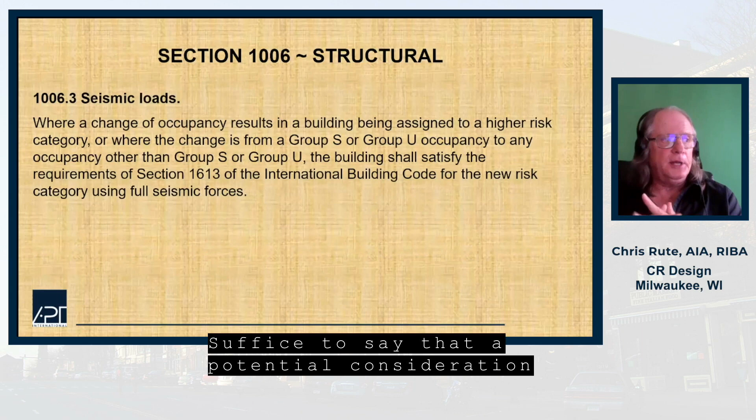Similarly, the existing building structure may need to be evaluated for adequate snow and wind loads for the new use. Section 1006.3 speaks to the structural issues related to seismic concerns for existing buildings in earthquake-prone areas. Since structures is a bit beyond my pay grade, I won't go too deep into it. Suffice to say that a potential consideration and your friendly neighborhood structural engineer should be a part of the project team early in the design phase.

Section 1007, certain special occupancies that offer specific electrical concerns require improvements or upgrades. Most of the special occupancies are less likely to impact typical Main Street projects. Places of assembly such as churches, museums, theaters are some of those types of special occupancies. I mentioned this simply to alert you to the potential.

Also, we need to be aware that unsafe conditions in electrical service, and numbers and locations of outlets may need to be upgraded to current standards. Mechanical systems may also need to be improved to meet current exhaust and ventilation requirements of the proposed new use.

Lastly, we have section 1009 dealing with plumbing fixtures. The plumbing fixture counts are required to be increased to meet the demand for the new use. For instance, a modification to an existing restaurant that results in an increase in the number of occupants would require additional fixtures to be installed.

A new exception added in the 2021 IEBC provides some relief if the occupant load is increased less than 20%. Section 1009 also includes additional requirements when a building undergoes a change of occupancy involving food handling establishments, grease traps, chemical waste, and mechanical facilities.

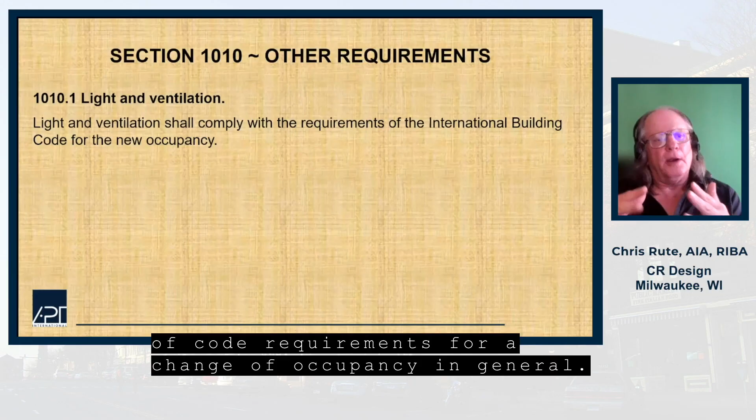In addition, requirements from a level 3, 2, or 1 alteration need also be taken into consideration. It is when a change of occupancy classification is proposed that significant additional requirements must be met. So let's take a look at some of those.

It is IEBC section 1011 that may be most likely applicable for revitalization projects on Main Street buildings. Buildings formerly used as offices or for manufacturing might be converted to multifamily residential with retail or restaurants on the first floor. These are some examples of a change of occupancy classification.

It's important to note that this section will also apply to a change of occupancy that is proposed that has a different fire protection threshold. It also reminds us that the requirements we went over previously, sections 1002 through 1010, will also apply.

Fire protection requirements are the first then to be addressed. I have heard it stated that this is likened to a change of occupancy penalty, and to a degree I understand that. The alternate performance compliance method Marilyn spoke of yesterday exists and will be discussed in depth tomorrow. This strategy helps to potentially avoid the sprinkler requirement.

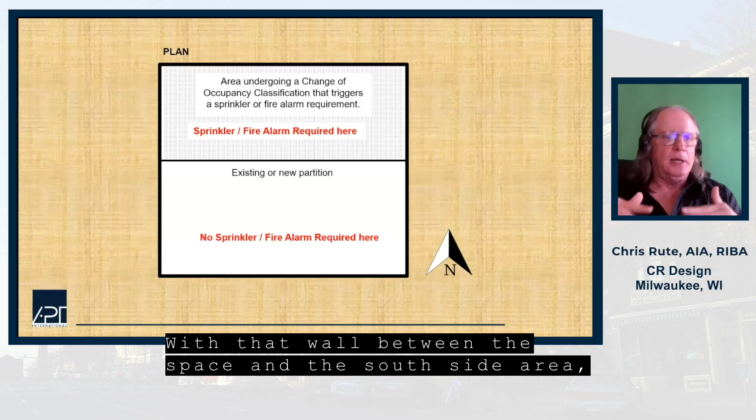As an example, I've created a plan view here where the north side of this area is undergoing a change of occupancy classification that triggers a sprinkler or alarm requirement. With that wall between the space and the south side area, the sprinkler or fire alarm will only be required on the north side.

I've got to make a personal note of caution here, because sprinkler systems are designed to limit the spread of a fire at its incipient stage. The potential challenge would be that a fire starting in the unprotected portion of the building and then spreading to the area protected with a sprinkler system might be of a size that would overwhelm the sprinkler system.

Also, the largest significant cost associated with the sprinkler system in an existing building would be bringing the water main to the building and the riser piping and its appurtenances. Once this is done, the sprinkler piping to an entire building may not add as much or more cost, depending, of course, on the size of the building.

This section is easy to understand: interior finish requirements need to be brought into compliance with those for the new occupancy classification. The flame spread and the smoke development ratings are important life safety considerations.

Beyond fire sprinkler and fire alarms, the next significant areas of concern when a change of occupancy is proposed are egress, the ability to get out of the building in an emergency situation, height and area of the building, and the location of the building on the lot. Each of these areas of concern are dictated by the occupancy of the building, along with other factors.

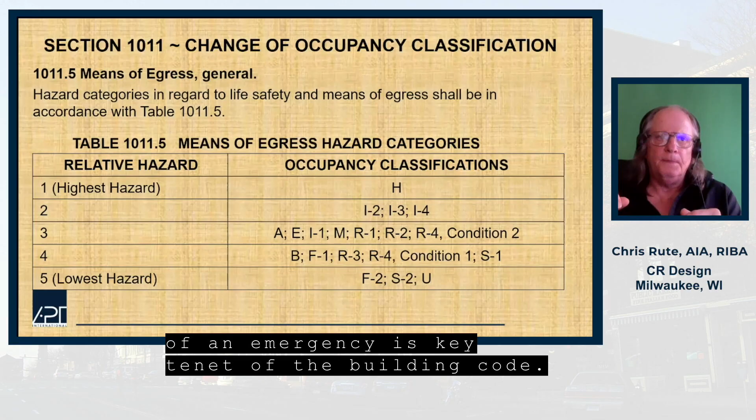Table 1011.5 speaks to egress. Safely exiting a building in the event of an emergency is a key tenet of the building code. This table indicates the relative hazards for each occupancy classification regarding exiting. High hazard occupancies are the highest, with factory F2, storage S2, and utility U occupancies being the lowest.

The next code section tells us that this requires the entire means of egress system to be evaluated and, where necessary, brought into compliance with the requirements for new construction. There are a few exceptions worth noting. The first three make allowances for existing stairs that would be difficult to bring into complete compliance with IBC Chapter 10 for new construction. These include upgrading the enclosure, acceptance of existing handrails and guards subject to the approval of the code official, and a provision for replacing stairs in an existing enclosure that failed the minimum tread and maximum riser dimensions.

These exceptions address corridors, reducing some of the requirements that might otherwise render a project infeasible, such as the allowance for lath and plaster as opposed to a new wall, transom openings being allowed to remain, and existing dead-end corridors being acceptable.

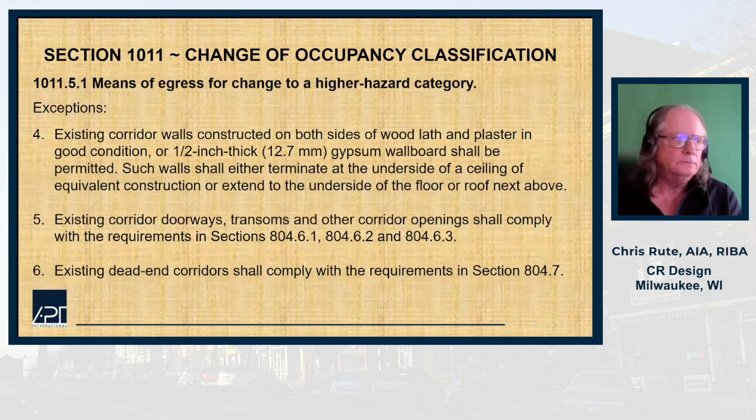And the last exception would allow at least a less restrictive alternative to emergency escape and rescue window requirements when they exist and when they're required.

For the most part, a means of egress system is deemed acceptable when the change of occupancy classification is to one of a lesser or equal hazard. The code does refer us to IEBC section 905, and then subsequently sections 804 and 704, for potential improvements to exiting based on alterations. The exception here mirrors that included in the previous section for stair reconstruction in confined existing shafts. It must be noted that any new construction or modified portions of a means of egress must comply with the requirements for new construction unless it meets the exception criteria.

A few additional exiting requirements are noted. Exit sizes must meet or exceed those needed for the new occupancy. Existing handrails or guardrails must conform to the requirements of those elements as specified in IEBC Chapter 8 for Level 2 alterations.

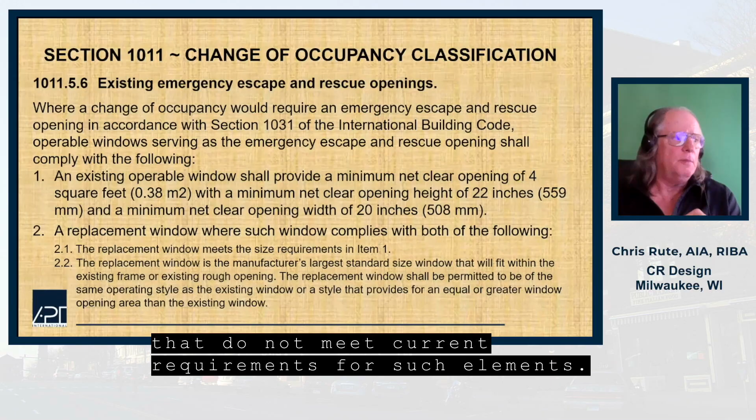Now we can move on to allowable heights and areas under table 1011.6. The existing building undergoing a change of occupancy classification must be evaluated. Allowable height and area for buildings is a function of the building's class of construction and its occupancy classification. The less combustible a building is, the larger it can be in general. Similarly, the greater the capacity for self-preservation an occupant has in an emergency, the larger the building is allowed to be. As you see here, the relative hazard ratings differ from those for means of egress, but they're all identified.

A change to a higher hazard will require the existing building to be evaluated for class of construction, to determine if the allowable area for the proposed new occupancy classification is adequate, as if it were a new building. If the height and area of the existing building exceed those allowed for new construction, aggressive and costly modifications would normally be required to improve the class of construction to one that allows the existing height and area for the proposed use. Firewalls, reducing the size of a building area by creating smaller separate buildings, may be one way of overcoming an area excess as well. A careful study will be needed to determine if this is feasible.

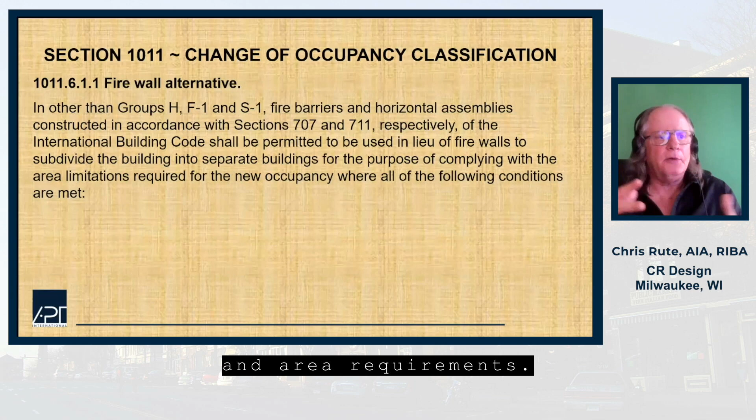There is, however, a firewall alternative that we have, and this section allows the use of fire barriers and rated horizontal assemblies to create separate buildings for the purposes of applying the height and area requirements. This allowance comes with three conditions.

The first is that it requires an NFPA sprinkler system be installed throughout the entire building. It limits the allowable area between the fire barriers or horizontal assemblies to an area that does not include a sprinkler increase. And ratings of fire barriers in accordance with the firewall ratings of Table 706.4 of the IBC are required to enable us to take advantage of this.

But this section does provide the necessary flexibility in meeting height and area requirements in existing buildings, such as old mill complexes, where achieving the height and area limitations is very difficult. Of course, when a change to an equal or lesser hazard is proposed, the building area and its height are deemed acceptable as they are.

This provision regarding fire barriers requires that fire barriers comply with the IBC in a mixed-use building where the proposed change of occupancy is made to a higher hazard. The exception recognizes the ability of existing plaster and lath construction to provide at least a one-hour fire resistive rating, which is very helpful in many instances.

So now we've looked at exiting, area limitations, and height limitations, and now the third element is our exterior wall requirements. They are based on the class of construction and the building's fire separation distance - that is, the proximity to property lines and other buildings on the same site. The rating of exterior walls and the area of openings are of concern to minimize the potential for spread of fire from one building to another.

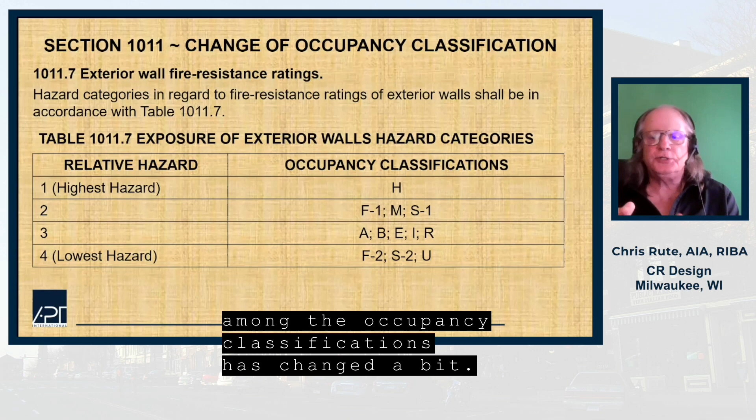Once again, we see the relative hazard rating among the occupancy classifications has changed a bit. A change to a higher hazard will require the existing building to be evaluated for class of construction, exterior wall ratings, and exterior wall openings to determine if those elements meet the requirements for the proposed new occupancy classification as if it were a new building. According to IEBC commentary, the exception here is somewhat academic in that these occupancy classifications are never required to have a 3-hour fire resistive rating on exterior walls. I would imagine that at some point those will be changed in the near future.

And here we see that consistent with the height and area category, a change to an equal or lesser hazard will consider the existing building exterior walls and openings to be acceptable as they are.

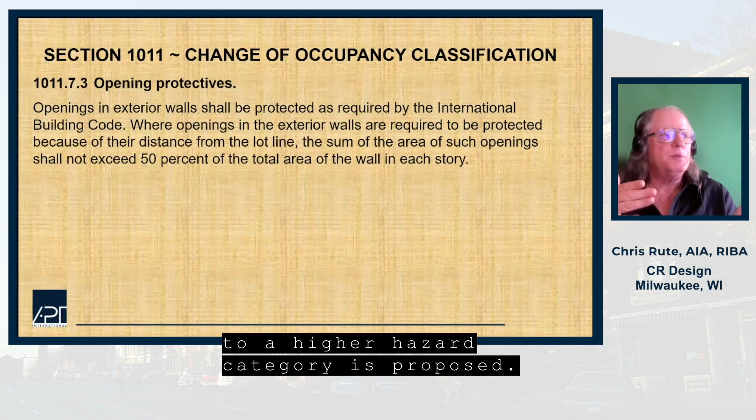This section deals with our openings, our windows, and that sort of thing, and when they have to be rated. This section offers some additional relief for existing buildings where a change to a higher hazard category is proposed. The significance of this section is that it imposes a maximum area of openings to be 50% of the wall area when the fire separation distance requires opening protectives, even though it may exceed the percentages given by Table 705.8 of the IBC for new construction.

Some additional exceptions make it easier to deal with openings in existing buildings in certain situations. Of course, if the IBC allows more than 50% of unprotected openings, the 50% limitation would not apply. Similarly, protected openings are not required for low-rise residential buildings or buildings protected with a sprinkler system, nor when the change is to a lesser hazard of occupancy.

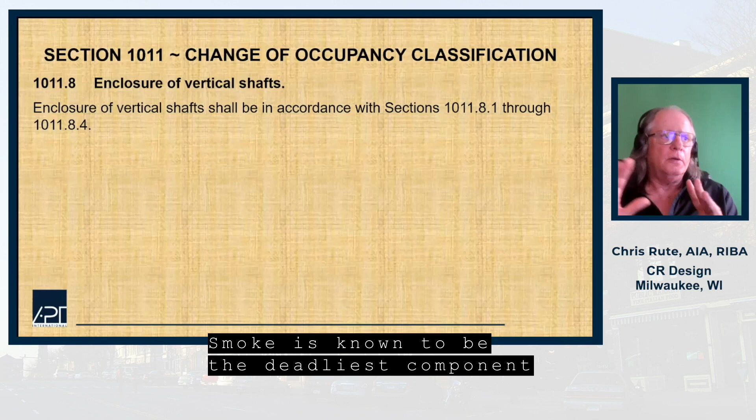Shafts of any description, be they for stairs, elevators, or ventilation, are all conduits for fire and smoke migration from lower levels. Smoke is known to be the deadliest component in a fire event. And when a change of occupancy classification to a higher hazard is proposed, the requirements of this section are to be met to further prevent migration of smoke and fire.

So in summary, Chapter 10, Change of Occupancy in the IEBC 2021, is an integral part of the work area compliance method. A change of occupancy is, I'd say, the second highest level of alteration to an existing building, additions being the highest. So we go from level 1, level 2, level 3, change of occupancy, and then additions as the hierarchy.

A change of occupancy classification to a higher hazard requires significantly greater life safety measures to be provided that will emulate those required for new construction. Provisions do exist, however, that will relieve some of the code requirements that could limit the success of a proposed adaptive reuse of an existing building.